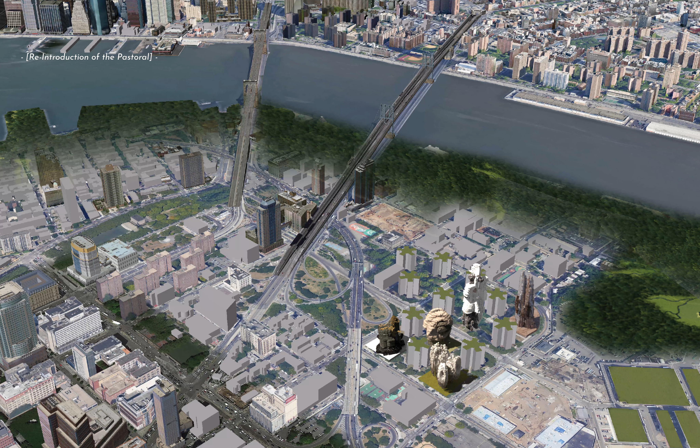In our attempt to incorporate aspects of the pastoral, we looked at the precedent set by the Welikia project, which explores what the 5 boroughs would have looked like with their native flora and fauna. It attempts to provide the basis for all the people of New York to appreciate, conserve, and reinvigorate the natural heritage of their city. Our design places equal emphasis on scale and function as the defining characteristics.

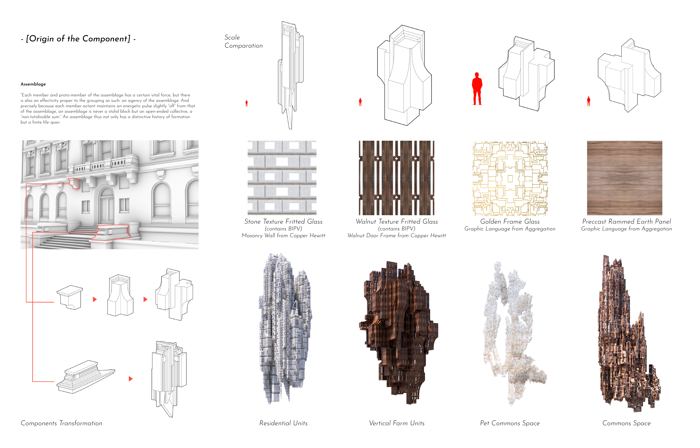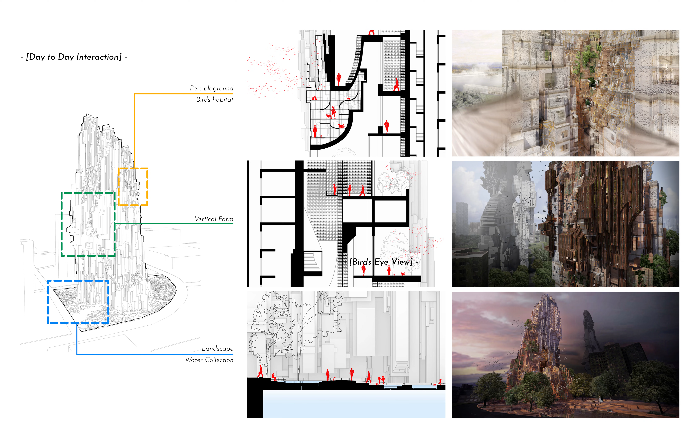The different massing elements were synergistically combined to organize the structure formally. Taking the concept of varying scale, we began to find a way to join the massing elements through an aggregate form of expression. Varying scale allows for the distribution of function according to scale, use, and activity. These varying functions come together to invigorate a sense of community.

From birds to bees to humans, the building provides habitat for all. Being just over double the height of the existing Farragut buildings, we found ourselves pushing the limits of the allowable FAR.

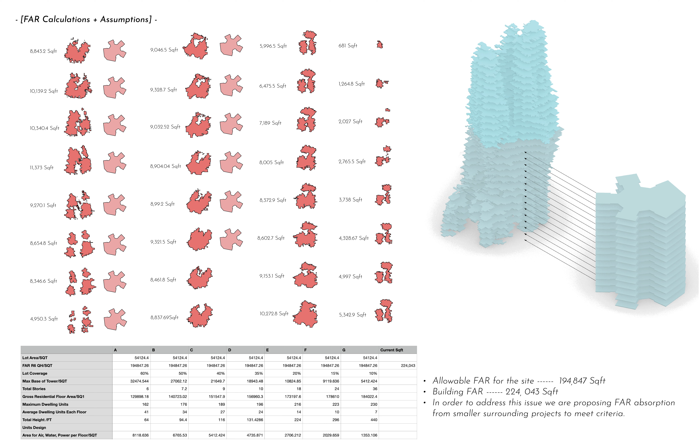We addressed this issue by absorbing unused FAR from smaller surrounding buildings in order to meet the criteria. Playing the role of nature's pollinators, bees are a crucial component of natural growth cycles. With pesticides and climate change causing mass population and habitat loss, our building incorporates integrated spaces for bees to colonize and interact with the vertical farm systems in the building.

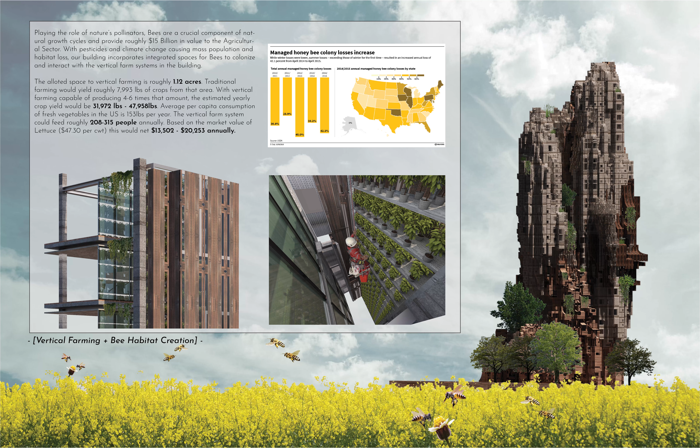Additionally, the allotted vertical farming is capable of providing fresh produce year-round for the entirety of the building's occupants. In order to understand the financial sustainability of the project, it is important to understand the associated costs and what cost-saving measures can be implemented.

The BIPV would cover its own cost in roughly 3 years and continue to provide 100% of the building's electrical needs for years to come. Several federal grants and subsidies exist to help offset these costs as well.

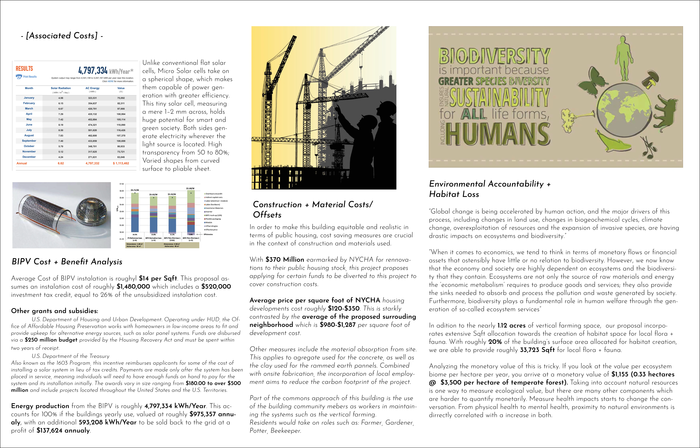In addition to nearly 1.12 acres of vertical farming space, our proposal incorporates extensive square footage allocations towards the creation of habitat space for local flora and fauna. With roughly 20% of the building's surface area allocated for habitat creation, we are able to provide roughly 33,700 square feet for local flora and fauna.

The aggregate scalar language of the design constitutes associative bodies in the sense that each is, by its very nature as a body, continuously affecting and being affected by other bodies. This interplay creates a new spatial relationship not found in other structures.

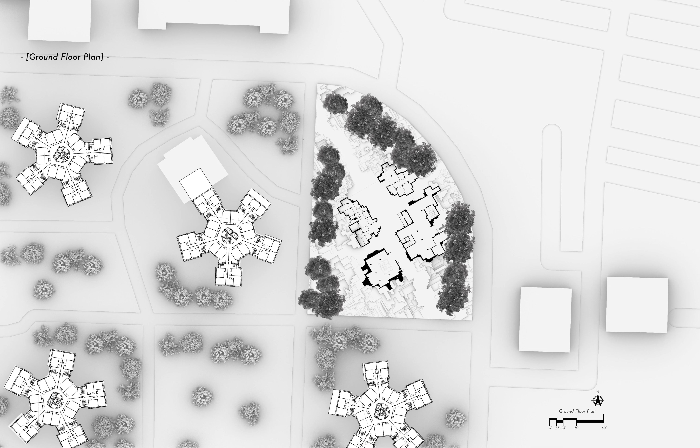Whether it be humans, birds, pets, or plants, the spaces offer the possibility of harmonious interactions between these species through the incorporation of varying scales. These scales weave the fabric of the structure.

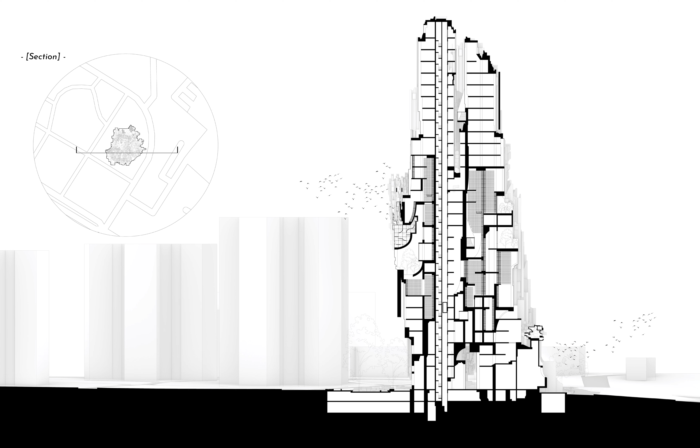The distinction between commons and private zones is directly tied into scalar differentiation, with the majority of outdoor elevated common spaces being in the lower and larger sections of the building. The private residential components work their way up to the tower to the upper limits of the structure.

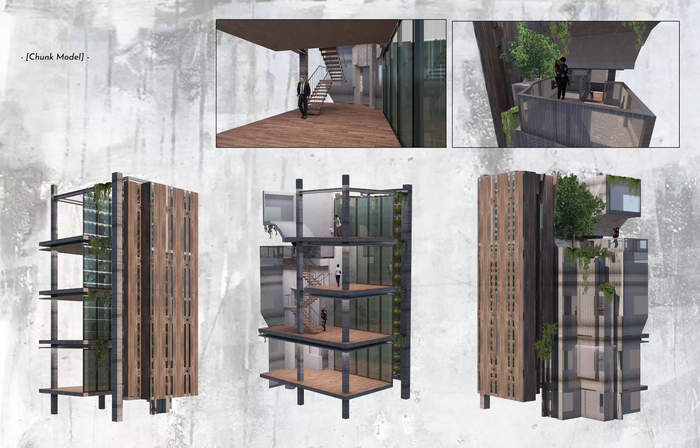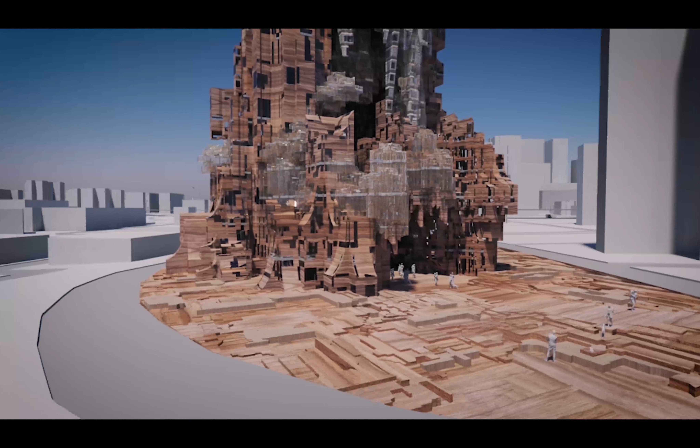In certain sections, this separates the residential from the vertical farm, giving residents a personal relationship with the food they eat. The residents, both human and animal alike, are able to enjoy plentiful amounts of sunshine on a daily basis, as most of the surrounding buildings do not encumber the sun's radiance.

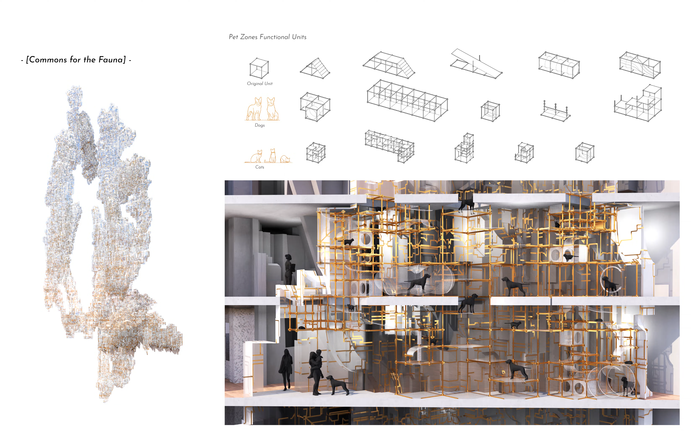Relative to the other structures, the intimacy between humans and animals is stronger in this building. How do natural roles change when you increase the overlap in daily interactions? What does habitat look like when viewed through these different roles?

We are proposing a new form of habitat with birds, bees, pets, plants, and humans forming a symbiotic aggregation. This project looks to redefine the concept of public housing.

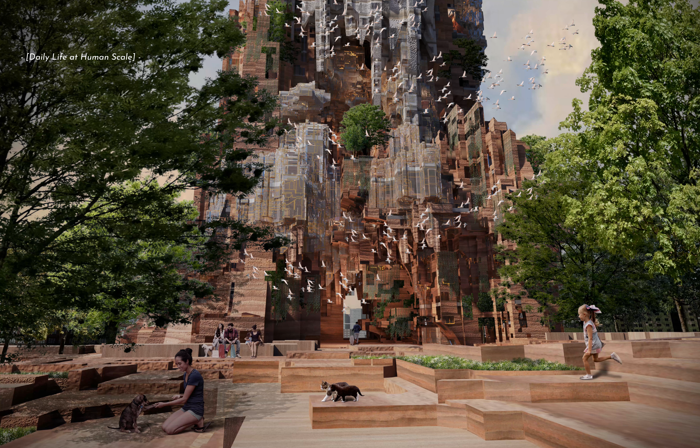Under the premise of using complex compositional language, we made the commons our priority in the hopes of pioneering a revolutionary change in the neighborhood. We hope to affect the surrounding economic system and ecosystem and generate a growing community organism.